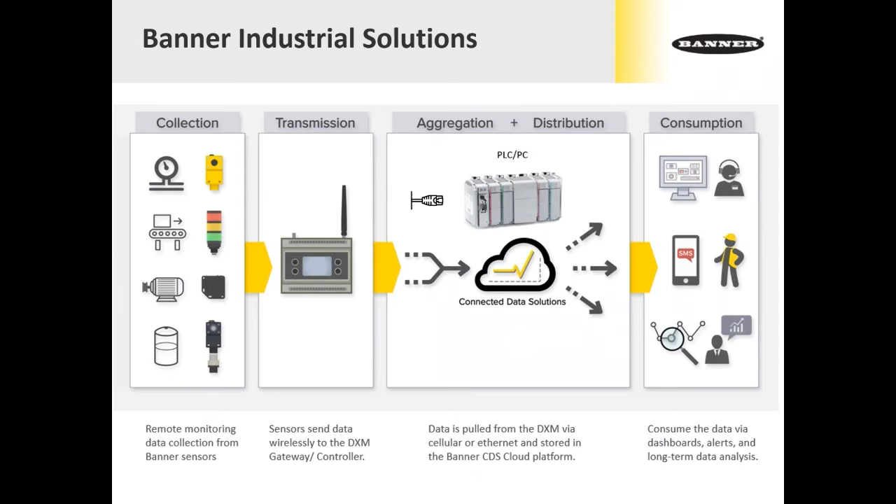Then you have the consumption side of it. The consumption is where you might have somebody in a central control room or monitoring room viewing all this data coming up from the plant floor. Or it could be a text message hitting someone on the plant floor or at home, or an email. That's considered the consumption, along with long-term data analysis, or what people are considering the artificial intelligence of going through data.

Some of our competitors have done a really good job creating these real fancy dashboards, which would sit on this end of it. But the part that Banner excels in is from the very beginning, from the data collection side, from the transmission with our new DXM controllers, along with our connected data solutions, on through the consumption side. So we can offer you the entire piece of this, where some of our competitors can only offer you bits and pieces. That's one other good reason to work with Banner when it comes to these monitoring solutions.

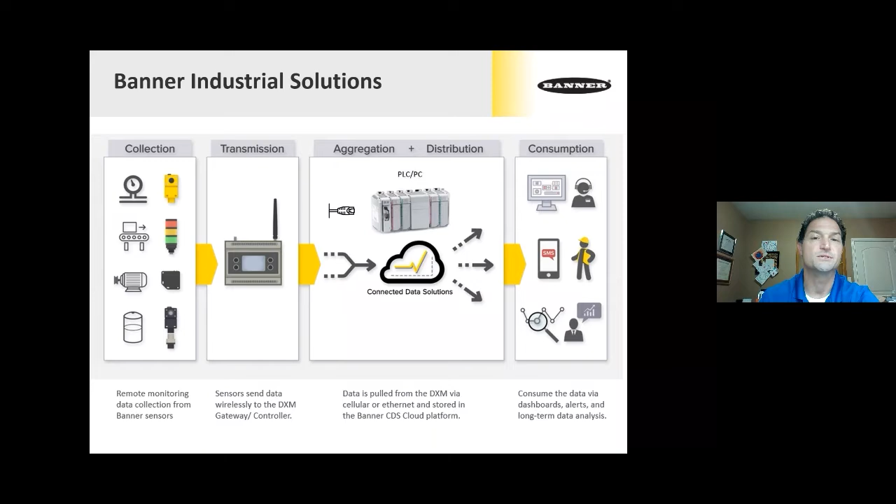So what do some of these pieces look like that I'm talking about? What do they actually do? Some of the peripheral devices we have, like our Pick-to-Light, this is a radio built into a small HMI. It's called our Direct Select, and Steve will go into more detail. This is a wireless device that would communicate back to one of our controllers.

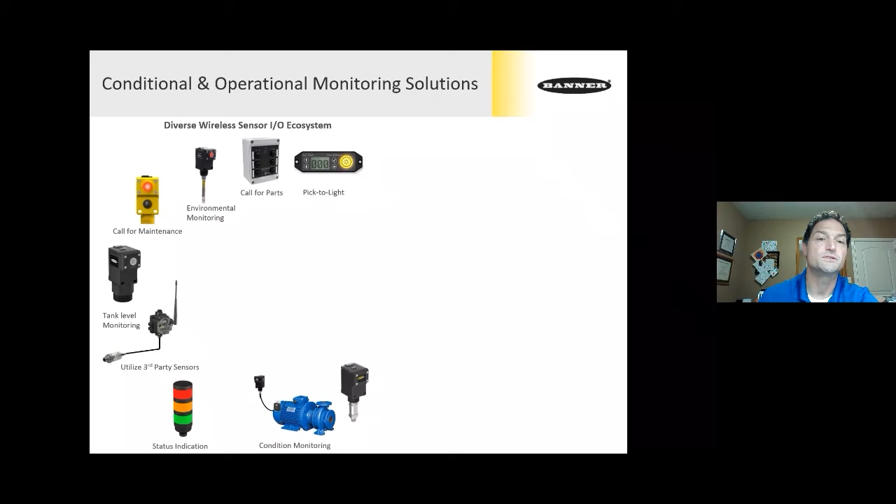Or maybe you have a call for parts application. This would be a product that might sit at an operator station, and possibly on a fork truck driver, letting them know that you need to bring parts to this location on the plant floor, that they're running low, or you need to refill a bin.

Or it could be as simple as a temperature and humidity probe with this built-in radio, that you're trying to determine if the level within your plant, the humidity and temperature during those real hot summer months, is causing you guys problems, and you need to be getting more water to your employees. It could be as simple as mounting a couple of these out on the plant floor.

Or it could be a call for maintenance or a call for supervision. So you have this one push button box, and we also have them in two push button boxes, that alarms a supervisor, alarms maintenance, or someone just to come and address a problem that's on the plant floor.

And then the all-in-one here, the tank level monitoring that we have. You have an ultrasonic built into a radio, so it could be tank level, it could be hopper level, anything that you need to take a measurement from. This would be a nice product to use for that. Also, this is a unit that we used in our solution kits that Brad Hart's going to go into more detail.

And then we have the nodes, or the radios, out on the plant floor that can collect discrete or analog data. This node here can collect 4 discrete in, 4 discrete out, 2 analog in, and 2 analog out. It can use third-party sensors. Obviously we prefer this to be connected to a Banner sensor, but it can connect to third-party sensors.

And then we've added into our tower lights the capability to have radios, whether it's in the base or in one of the segments of the radio. So if you have an existing tower light on the field and you want to wirelessly communicate to it and turn on the lights remotely, you can do that with one of our wireless segments that you apply to the tower light.

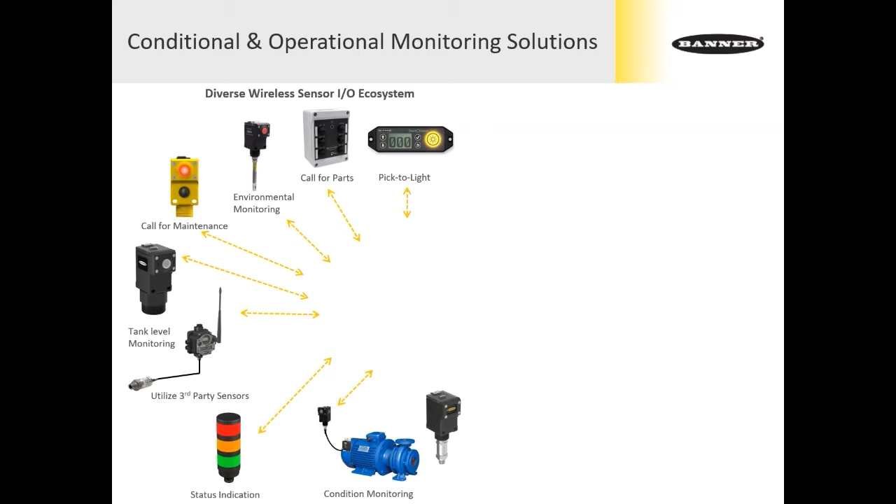So all these devices can communicate back into what we call our DXM controller, or some people might think of as our IIoT device or our edge device. As you can see, there's two antennas on it. One is meant to communicate proprietarily back to our field devices, our wireless devices, and the other is meant to communicate up to a cloud service.

It could be your own in-house cloud service, or it could be the cloud service that Banner is able to provide, and that's something that Steve will go into.

Or maybe your preference is to communicate to a PLC or PC-based control system on the plant floor. So with the RJ45 connection on our DXM controller, you can wire in directly into a PLC or some kind of managed switch via Ethernet IP, or soon to come our Profinet, or you can communicate Modbus TCP.

Also, directly from our DXM controller, we can do text alerts or emails. It's a simple setup that we have a write-up for on our DXM 700 controller.

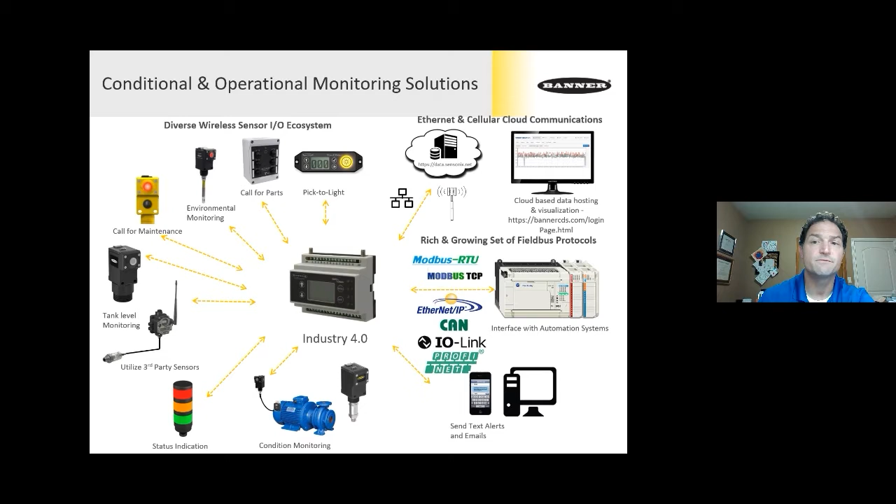So what does it look like for the types of networks that we can offer with these different devices? What we have is a performance network and a multi-hop network. The performance is a point-to-point communication. So from the DXM controller, you would communicate directly to one of these radios or nodes in the field.

And with the multi-hop, it's a mesh network, what we call self-healing. So if one of the radios needs to be used as a repeater to communicate to one of them further out, it will take that path of least resistance.

So with the performance, you can communicate up to 47 nodes out in the field. And along with that, we have two different frequencies offered: the 900 megahertz and the 2.4 gigahertz.

The 900 megahertz is the reason in the US it will be used, is the 900 megahertz gives you the longest range. So the distance that can be communicated is 6 miles line of sight. And we know that none of these facilities are line of sight unless it's agriculture. So we come in typically and we'll do what's called a site survey to make sure that we can communicate clearly between the DXM and each one of the nodes.

The 2.4 gigahertz is something that's going to get us about a 3,000 feet communication from the DXM to the individual radios out in the field.

They're labeled from motors 1 to 10, 11 through 20, 21 through 30, and 31 through 40. So you can do up to 40 motors with this system. Now, you may not have all 40 motors, so you can easily click on the X in the upper right-hand corner to hide those particular groups.

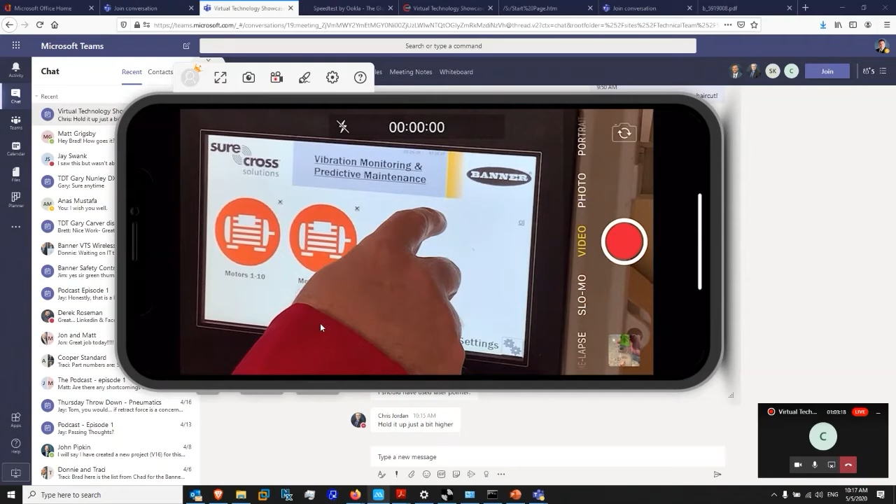Okay, maybe you only have a handful. Again, if you want to show those again, you just click on that same square to bring them back.

If we click on a group of 10, then we see an array of the 10 on the screen itself. And you will notice that one does show a unique green color, because that's the one I just affixed to the side of the motor, and that is the unit that is communicating at this time. None of these other motors have a vibration node communicating to our DXM.

Okay, these are unique names, motors 1 through 10. You can choose to click on the motor name itself and give it a unique name. Maybe I will call this... I'll just call it Brad, okay?

So now that text name is going to show up everywhere that's related to the motor called Brad, okay? But the first thing you would want to do when you get this solutions kit is go to the main screen. Let's go back to the settings. So this is the main screen.

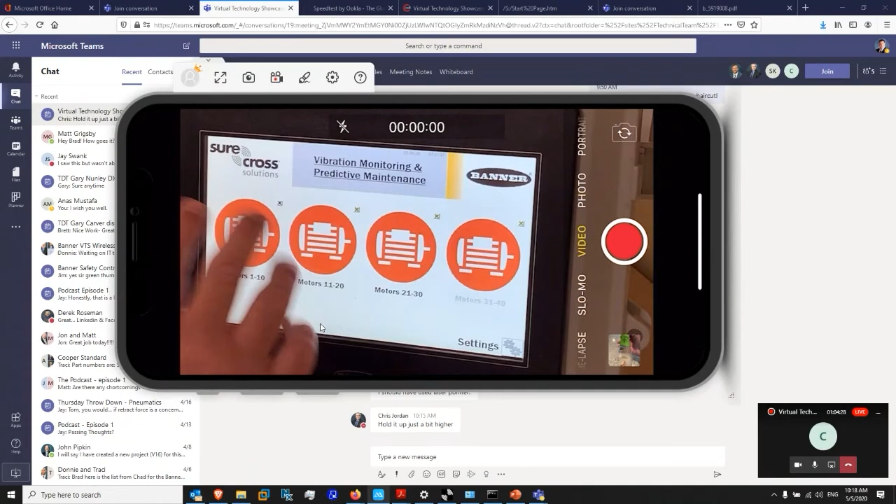In the lower right-hand corner is settings. Click on the gear icon. Now here's where we can set up the binding. Click on binding.

In groups of 20, 1 through 20, 21 through 40. Here's that name Brad that carried over.

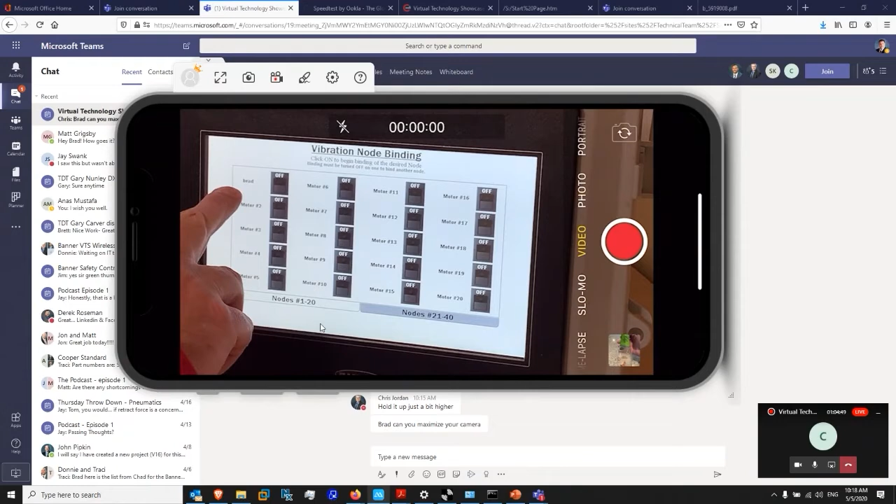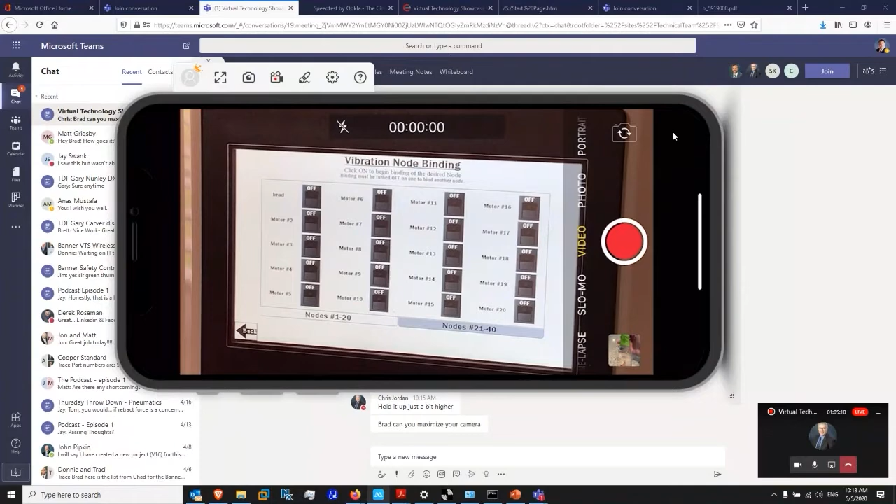Excuse me, Brad. Can I ask you to zoom in and maximize your screen? Absolutely. Well, I'm seeing your teams. That's why I'm asking, you're seeing my teams. Your teams window, you're sharing your whole desktop. Ah, I understand. Okay. Maybe that's a better view.

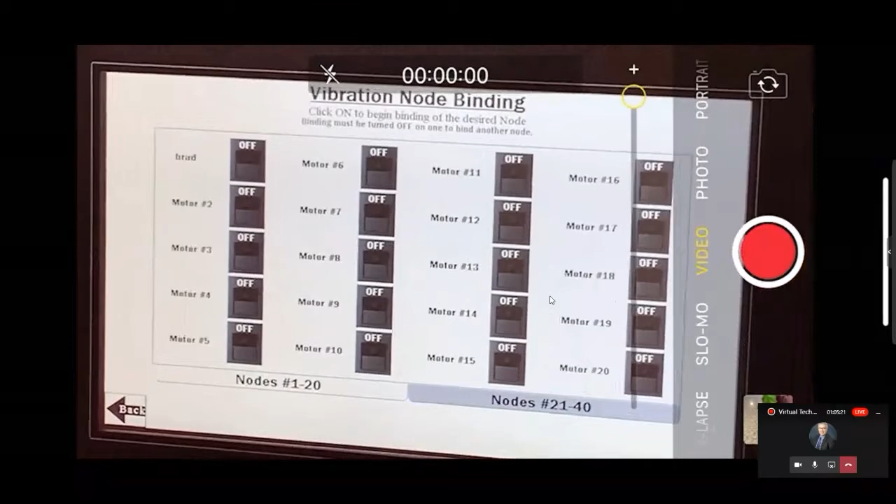Okay, so we would need to bind the node. Now what I'll do is take this, our second node, node number 2. Currently it is not powered on because there are no lights flashing on it.

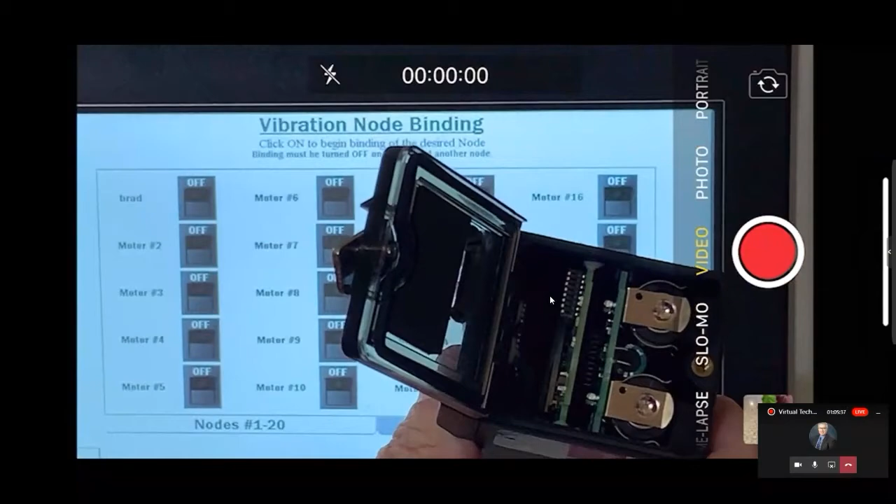So there is a button in the top of the node here that I can press and hold down, and then it will turn power on. You see the lights start to flash.

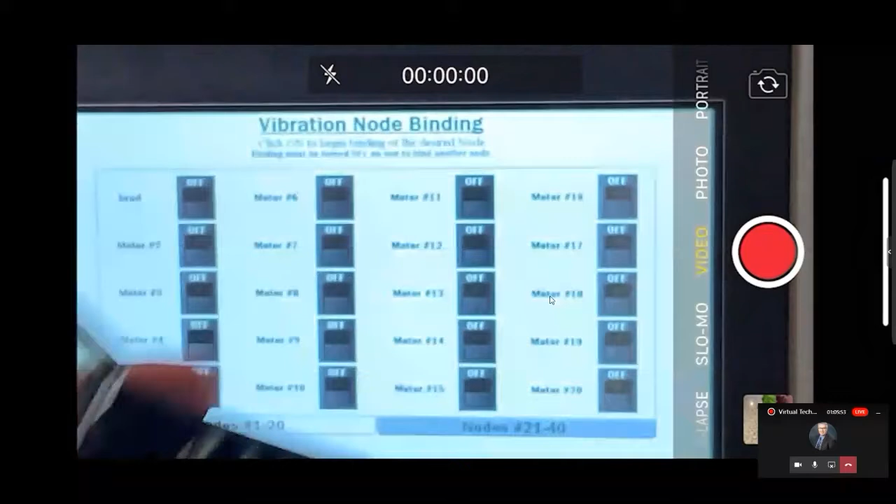Next thing I want to do on the screen is for motor number 2, I want to turn that switch on to put the DXM into a binding mode.

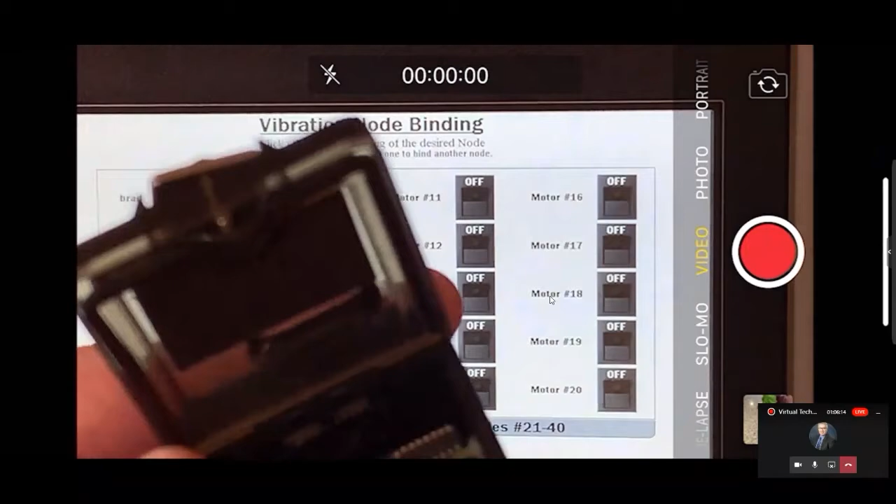Okay, so now the DXM is announcing out to the wireless world of Banner, hey, I want to bind node number 2. So going back to this node, to bind it, all you do is triple click button number 3, or triple click this button three times. 1, 2, 3.

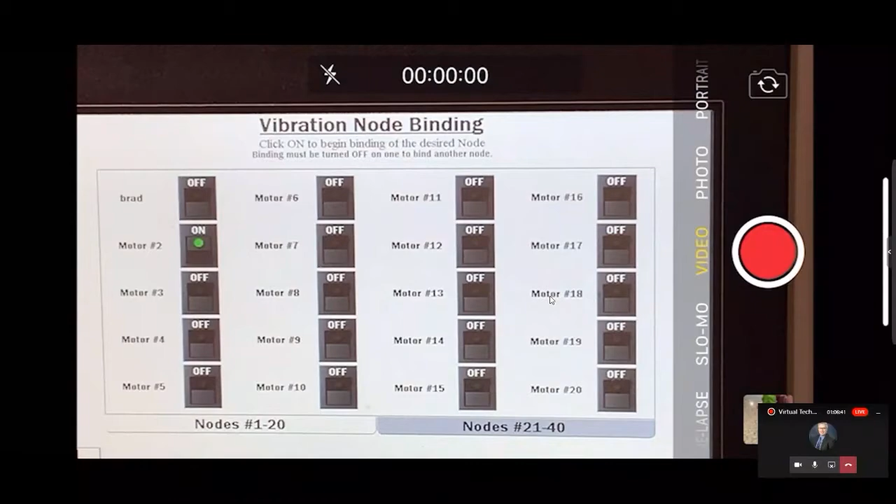You see the lights change state to go into a binding mode. And once it is bound, you will see the status change to confirm that it is binding or that it is bound to the DXM gateway. So that's how you go through the process of binding a node.

In addition to this style of housing, the Q45, you do have the traditional DX80 type, where they have the 2 rotary switches. The left switch does the tens digit, the right switch does the singles digit. And the same thing would be true.

Okay, put that in the binding mode, you turn power on. This determines the binding number for this node, and then it will become bound by triple clicking button number 2, and then triple clicking to turn it back off. Okay, so we're done with the binding, and that is bound.

So let's just ignore that nuisance message right now. All right, so now if we go to motors 1 through 10, we should see the status come up for motors 1 and 2. There's motor number 1.

All right, now if we go into motor number 1, okay, and again, I apologize for this message. This sometimes happens when you're doing a demo and you want to be able to monitor things in a fast mode, which I don't have at this time, so bear with me.

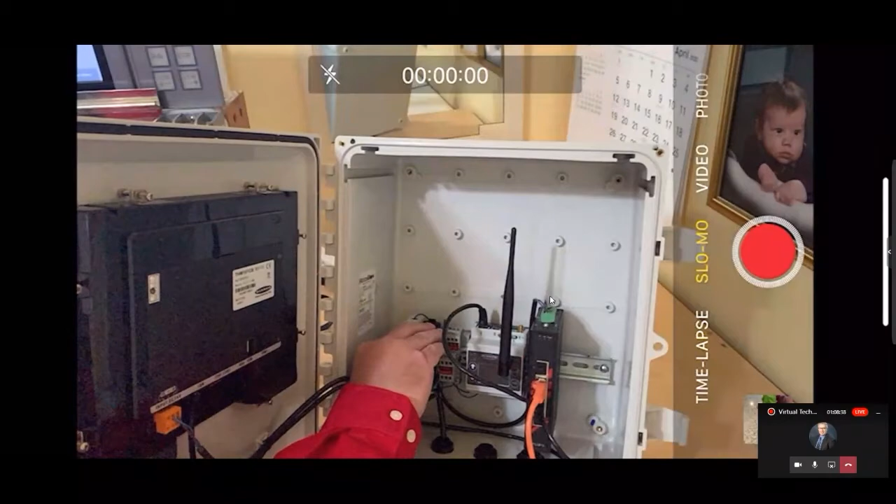All right, bear with me. Sometimes even when you do demos when you're live in front of a studio audience, or even through an event like this, things tend to happen, and that's okay.

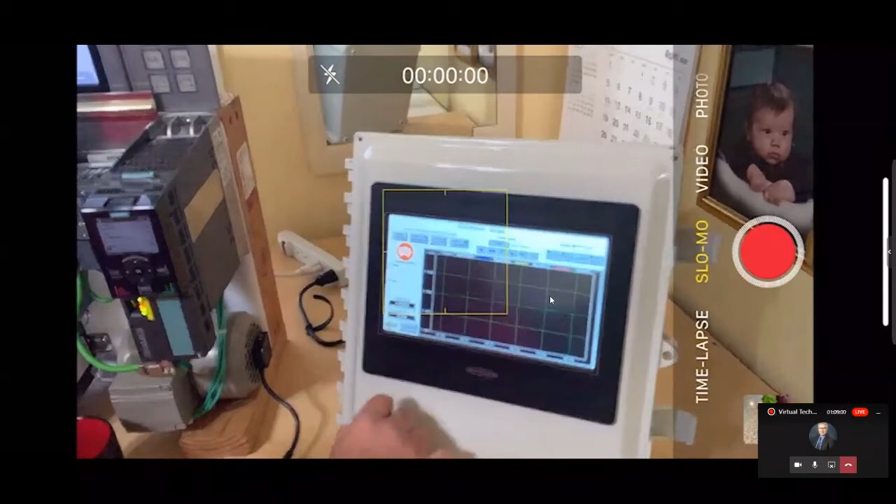We'll just reboot this. We got our node already connected now, and what I want to show you, once this boots up, we'll go in. Now this is the trend screen here.

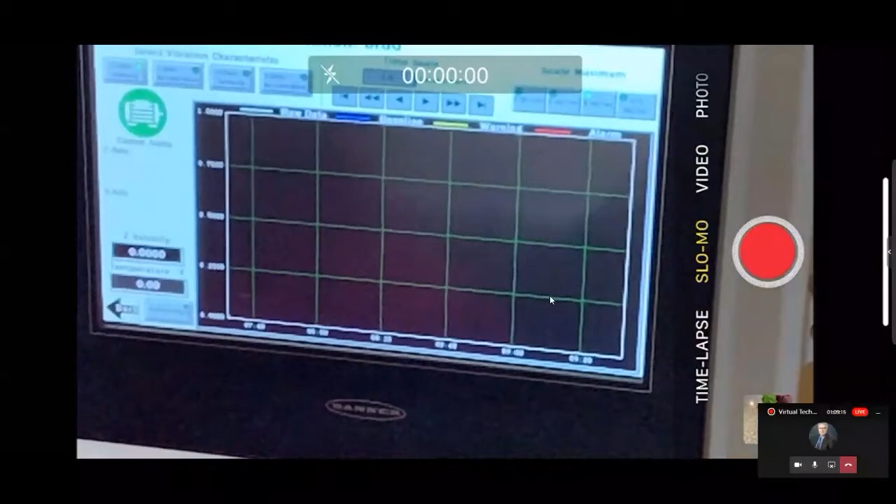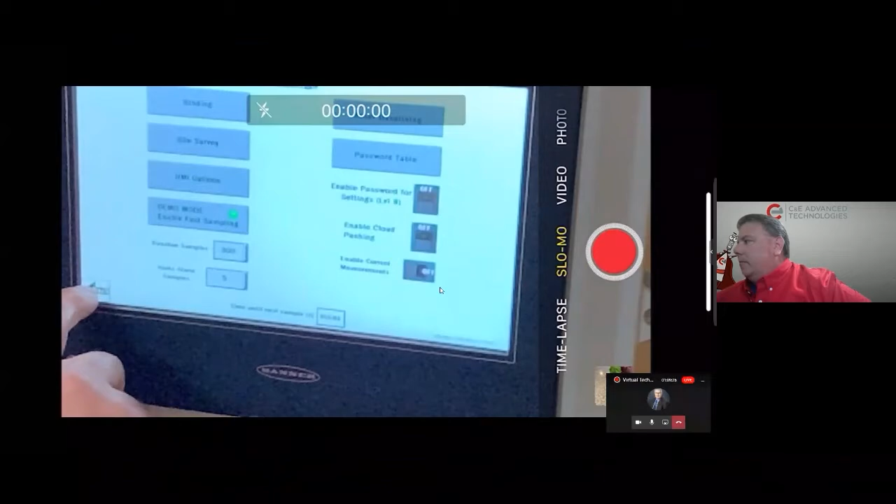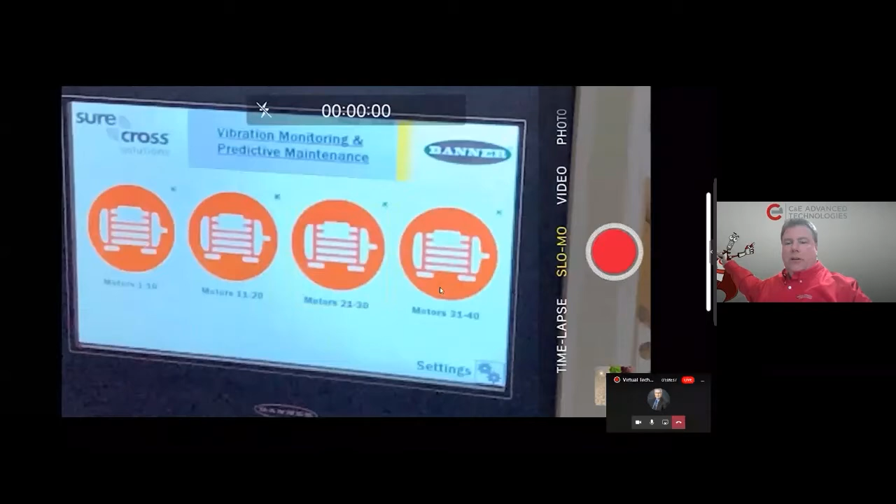Okay, and I'm going to start up my drive. Before I get that, I do need to put this into demo mode for fast sampling. Otherwise, the sampling that's occurring between the DXM gateway and the Q45 node here is happening every 5 minutes. So if we go into fast sampling, then it's occurring as fast as possible.

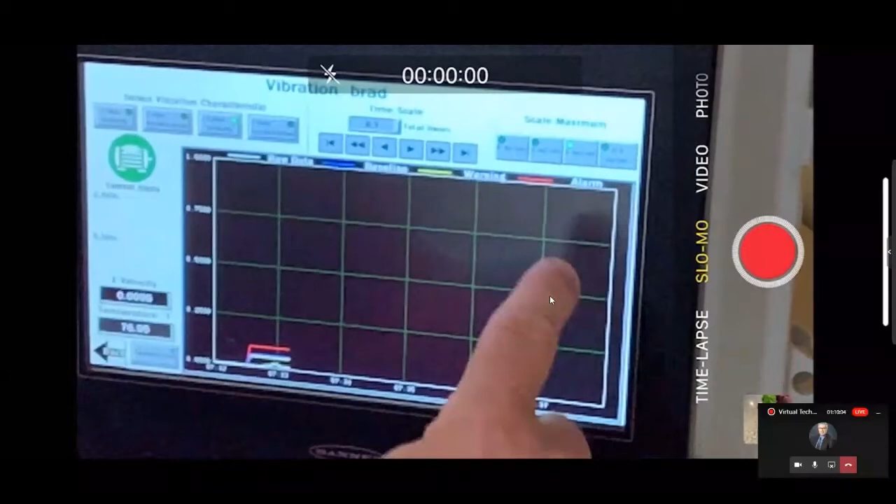Now I want to zoom in on the time scale. It's set to 2 hours. I'm going to change this to 0.1 hours. Scale maximum set to 1 inch per second on this velocity axis. I'm going to go to 0.5 inches per second. So now we can start to see the scale pop up here.

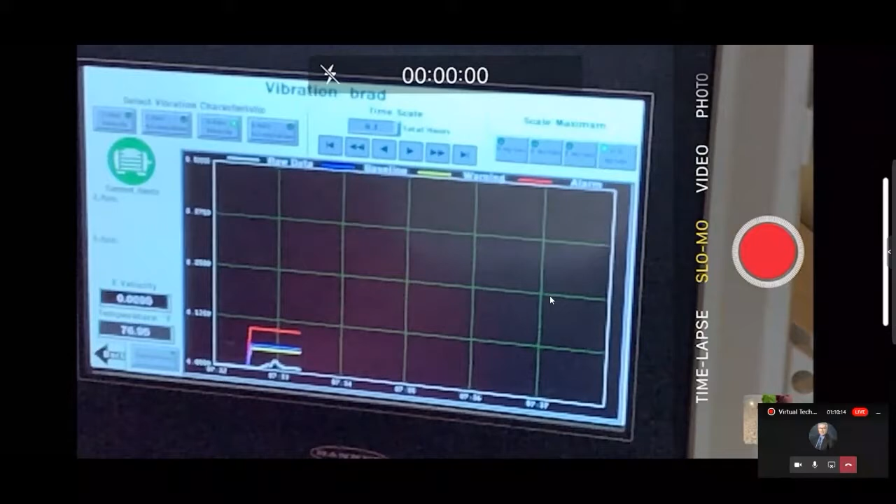I know it may be kind of hard to see from the camera here, but this is the x-axis velocity that I'm measuring at this time. And the value is 0.01 inches per second. And I'm running about 20% speed on the motor.

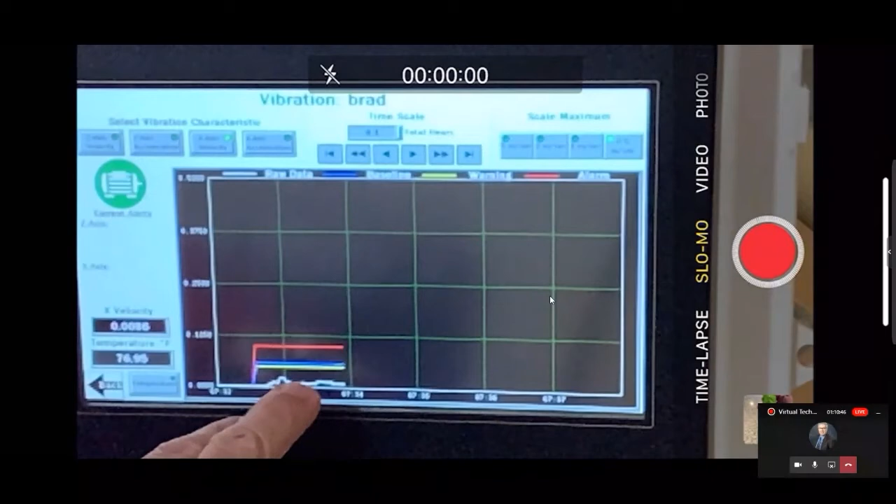Now, the other lines you see here, the white line is the actual value. The blue line is a previous baseline that was set previously, and I'll go into that in just a moment. The yellow line is for an alarm and or warning, and the red line would be for a critical alarm. I'll cover how those are set in just a minute.

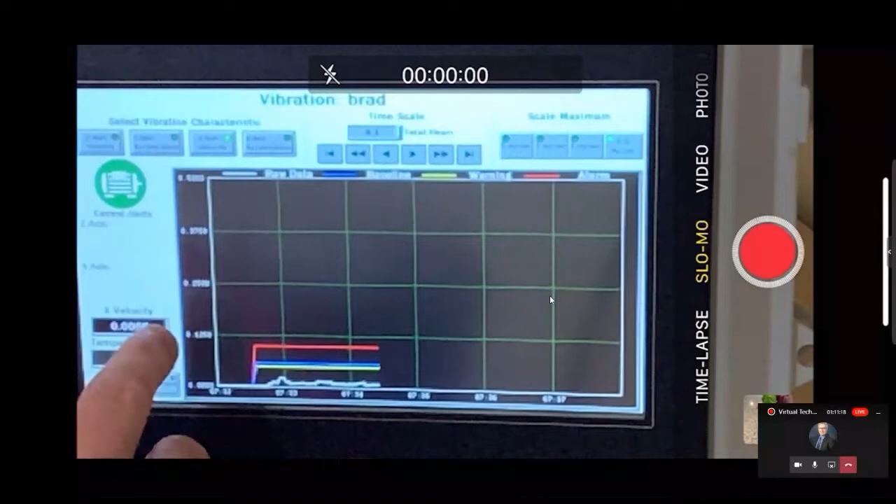But here we are, we see the velocity setting at 0.01 inches per second. Now, if I were to speed this motor up to about 30% speed, right now everything seems to be just fine and dandy. If I go up to about 40 or so percent speed, there's 48%. So far, so good.

But as I increase that and go a little faster, you may see a bump, but I believe if I have this set right, and I have a washer taped to the shaft to give me, to impart some vibration, otherwise there's no load on it. Now we see the spike in the velocity going above and then coming back down again on the warning track. Now our velocity is up to about 0.04 inches per second.

If I speed it up and go faster with that counterbalance on the shaft, I'm all the way up to 92%. If I go up to 100%, I can really start to feel the vibration. We'll see what the velocity does.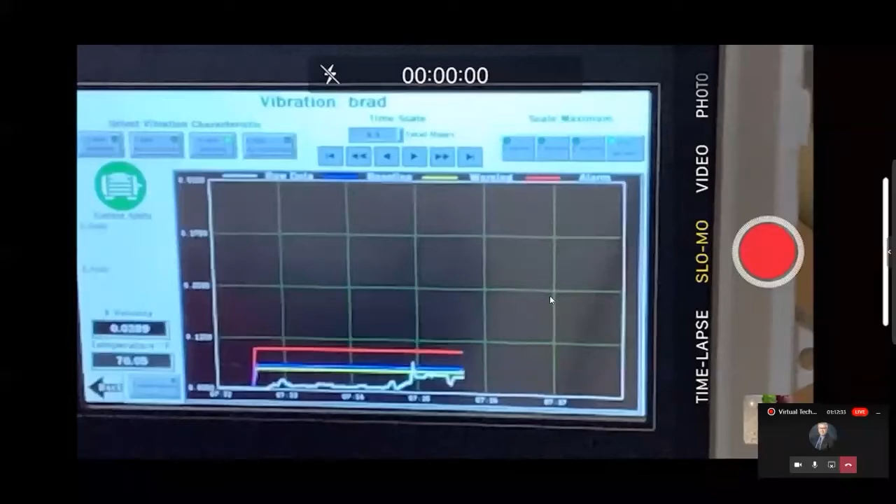All right, so we can see that occurring here. We can also go look at the acceleration. We see it trending as well. That's on the x-axis. We go now to the z-axis. We see that it's actually above what these threshold limits are, and we have an alert state and we've gone red. Okay, and then here's the acceleration as well.

I'm going to go ahead and turn off the drive. So the velocity is good for determining if you've got any issue with worn belts, a loose mount, things like that. Acceleration is good to determine if you have like a flat starting to occur on a bearing, which tends to come around maybe once a revolution, so to speak. So that's where velocity and acceleration comes into play.

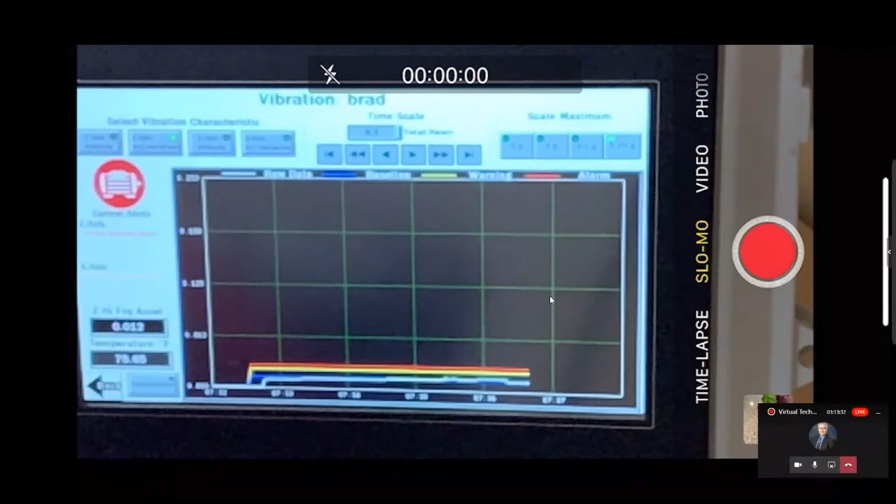You also have the ability to look at the trend of the temperature as well. Now, how these baselines are actually calculated, go to the main screen, go to settings, into asset baselining, and here's where you can actually start the baseline for one of the units.

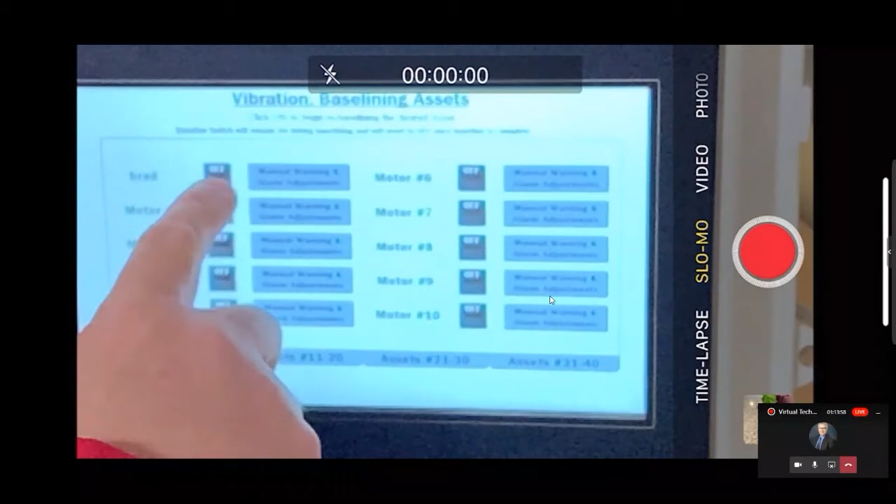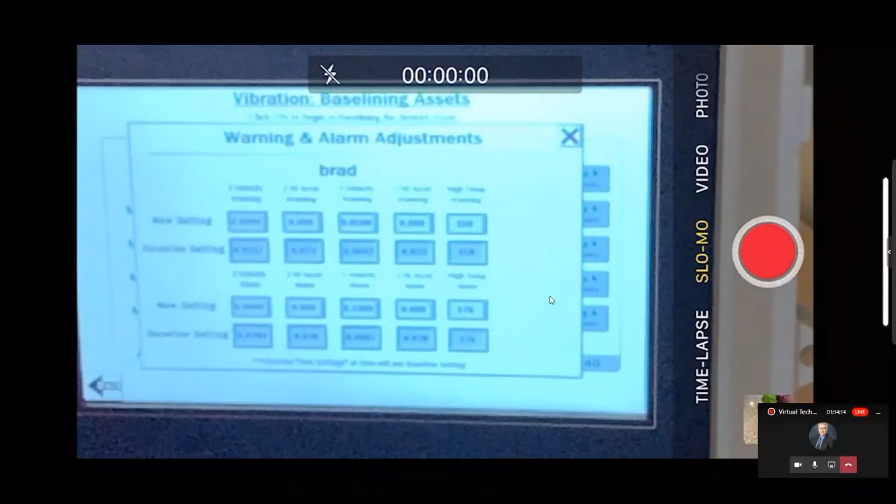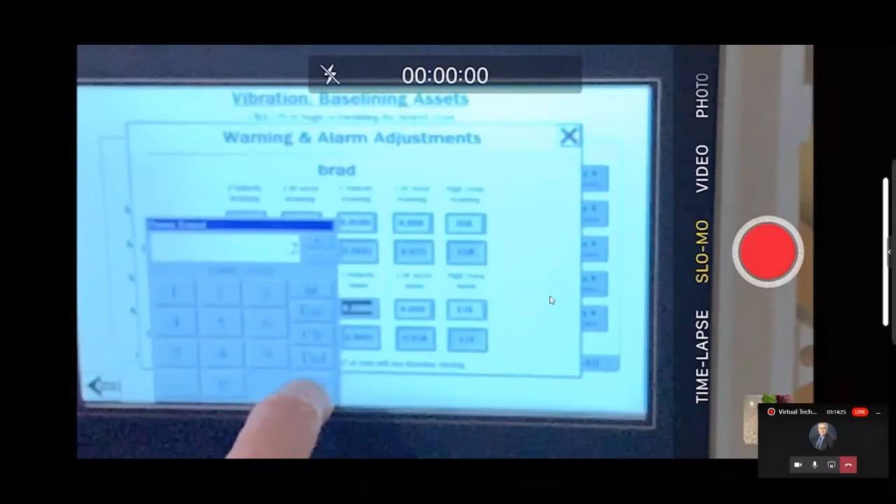Now, for some reason, I was already in a baselining for motor number 2, but you can actually manually adjust the baselines by clicking on the button for the respective motor and then manually changing those values. So if I wanted to bump one up, I can manually bump up the alarm setting for the X velocity from 0.1 to maybe 0.2 and enter, and now that setting will be there in place.

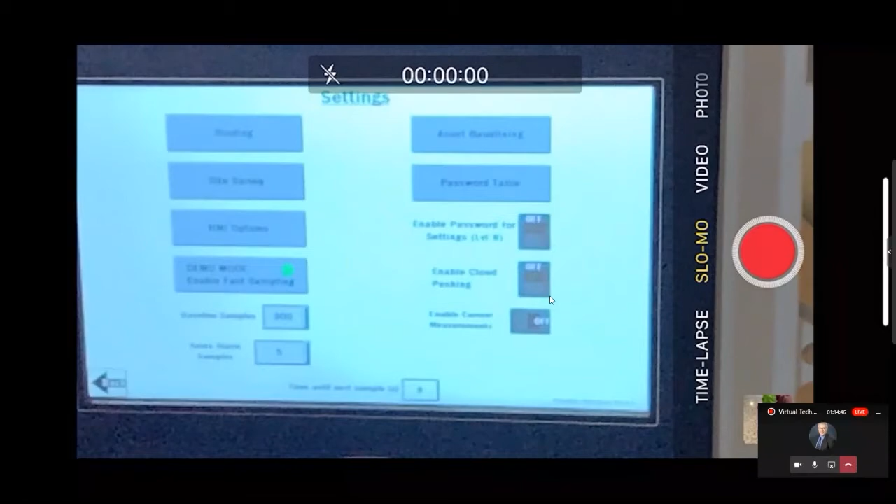But if I wanted to do a baseline, the total number of baseline samples by default is set to 300. And if we're taking a sample every 5 minutes, that's about 25 hours, I believe, to create the baseline. So you want to make sure that motor is running for a long time in order to generate that accurate baseline. The next field down below is called acute alarm samples.

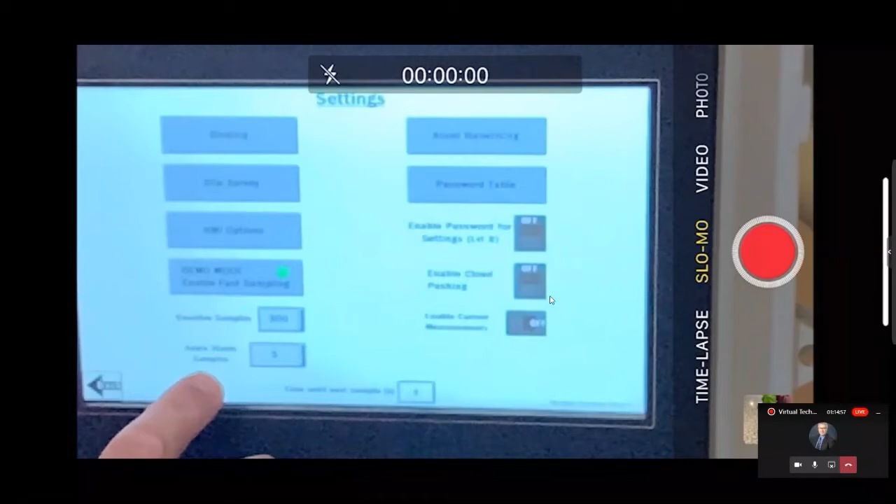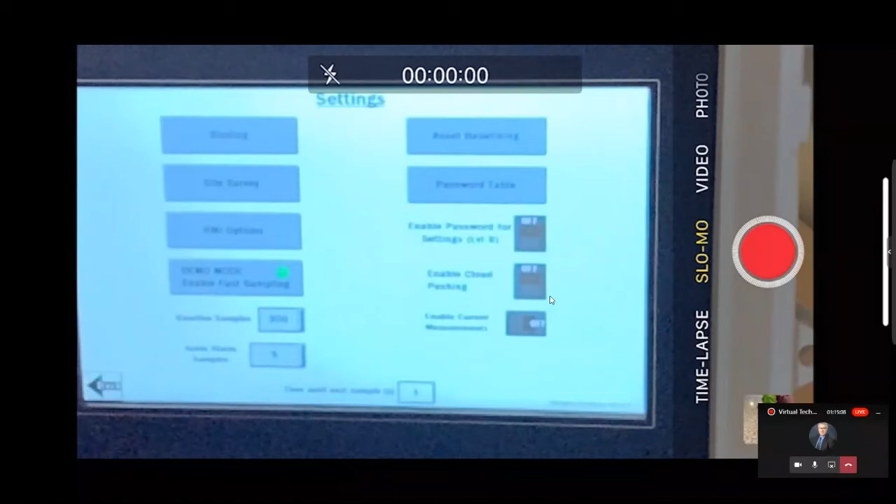All right, and that is set to 5 at this time. So that means that if there are 5 consecutive samples in which that value is above the alarm limit, then it's going to indicate you truly have an issue at your machine, your motor, your gearbox, wherever the case may be. And so that's going to go red and it's going to stay red.

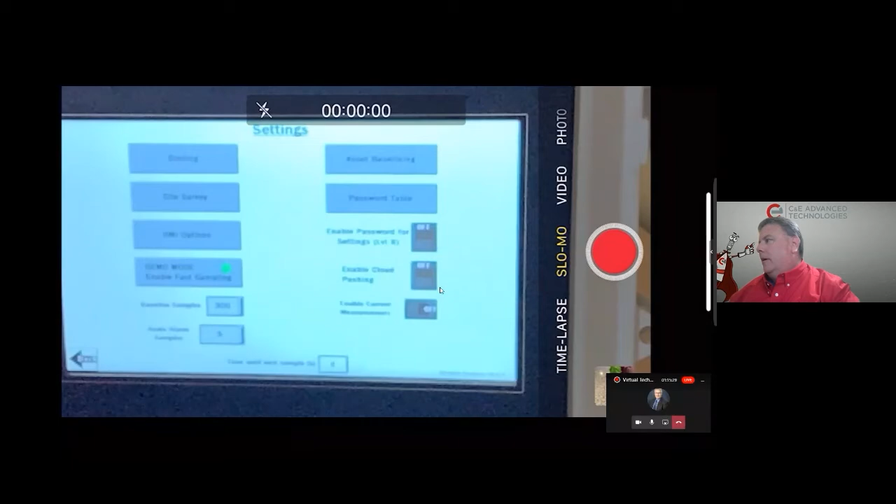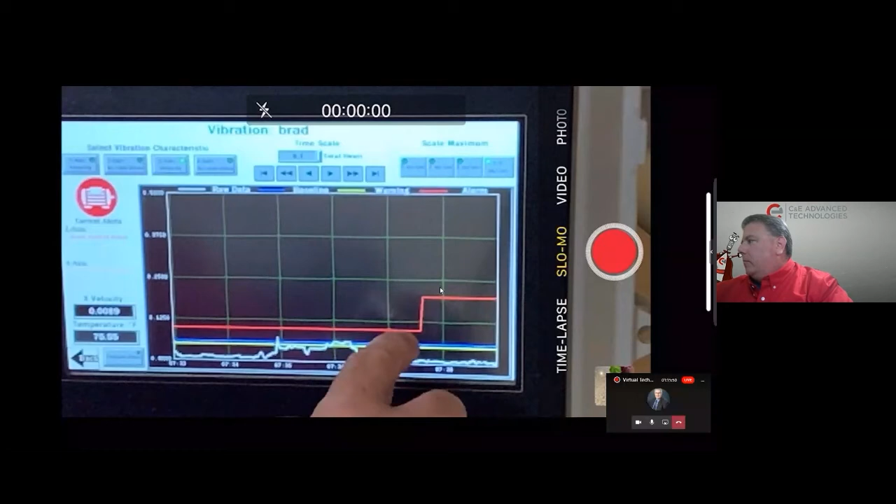Until you get the situation resolved. Once the baselining is complete, when you go back to look at your motors, you're going to have a new set of trend lines here, your baselines on your graph. And so that blue line, which is where you would have actually measured it, may have moved. If I was running at 20% speed on my motor, which in my case may be normal condition, that blue line would have moved further down to where that bottom white line is, okay? And the yellow and red lines would have adjusted accordingly.

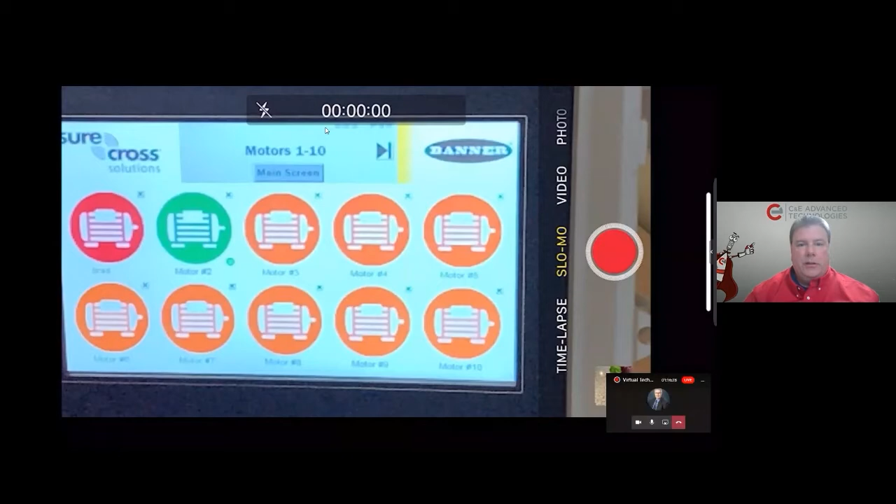Again, this is capable for up to 40 motors. And there are 2 other products that I believe Banner has as well for a solutions kit. You have the vibration temperature monitoring. Let me shrink this down here.

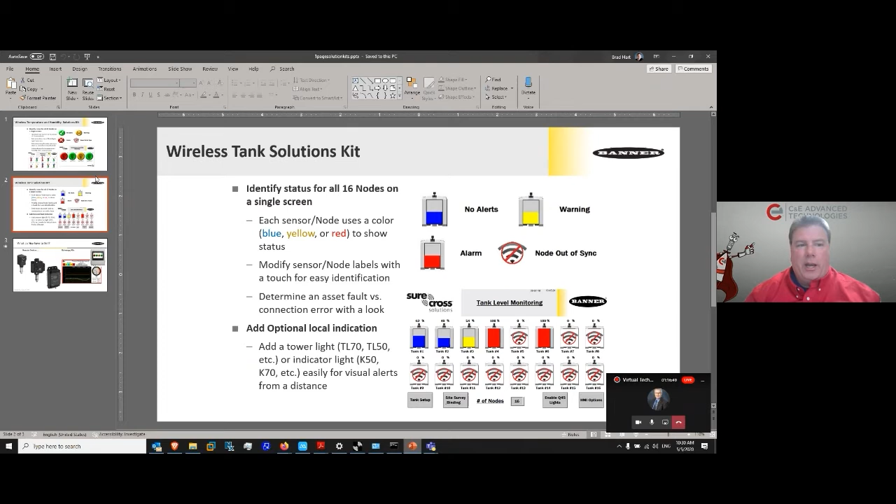The other two possible kits: there is a wireless temperature and humidity solutions kit that's available, and there is a wireless tank solutions kit. Now this one offers you to connect up to 16 nodes at this time, where the vibration and the temp and humidity allow you to go up to 40 nodes total. And looking at this last slide here, it looks like possibly there's one on the way that could be for pressure as well.

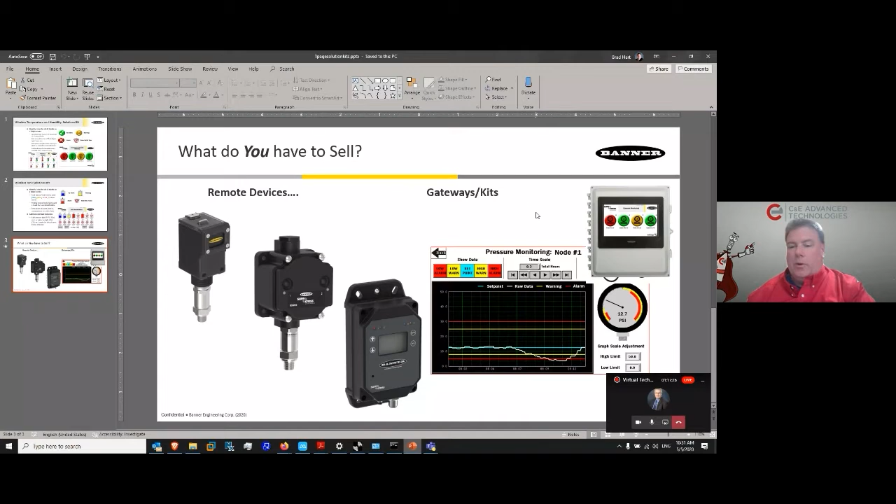I apologize for the hiccup there with the little nuisance alarm message on the screen, but for the most part, that is the solutions kit. Again, you just drop it into place, bind your nodes to your gateway, do your baselining for each of your sensors one at a time, rename your motors if necessary, and away you go.

Back to you, Hey Brad. Yes, so we have a question. Okay, can I send or receive a text message if an alarm happens?

Can you receive a text message if an alarm happens? There is the capability to send email messages, and you are able to send a text message via an email by using Verizon or AT&T, whatever carrier that is, to send a text message from an email. So that is possible. The DXM also has the ability to add a cellular modem to it, so in a sense you could send out text messages via the cell modem. So that capability is there, and it is possible.

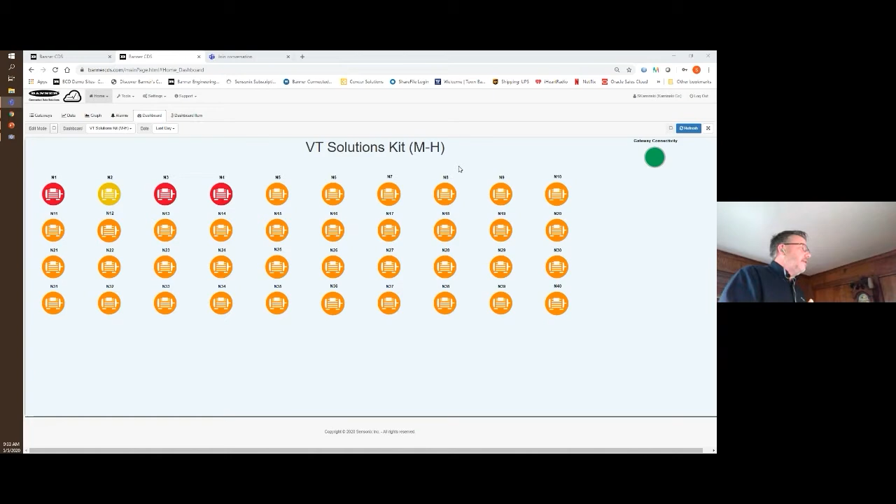So Banner CDS, and what this entails here that you see, is very similar to what Brad was showing you earlier with the hardware kit that would be located at your factory. This is going to be your virtual connection, so if you like, you can do it in this fashion as well. With this is a pre-established dashboard, you don't have to develop this. It comes pre-developed for you when you utilize Banner CDS for your vibration solutions kit. If you notice, we've got, like Brad had, 4 large icons on his first main screen.

You represented the icon number 1 was motors 1 through 10. I've got 40 different motors shown up here just to give you a quick view. But what you can do is, just like Brad was doing, he was drilling down into a specific motor and looking at velocity, acceleration, temperature, elements like that.

So what we have going on here is a real basic connection piece, if you would, to the same thing Brad was showing you. When I look at this, I'm going to grab one of my motors, and I've got motors that are either in a warning or an alarm state this morning. So I'm going to grab motor number 3.

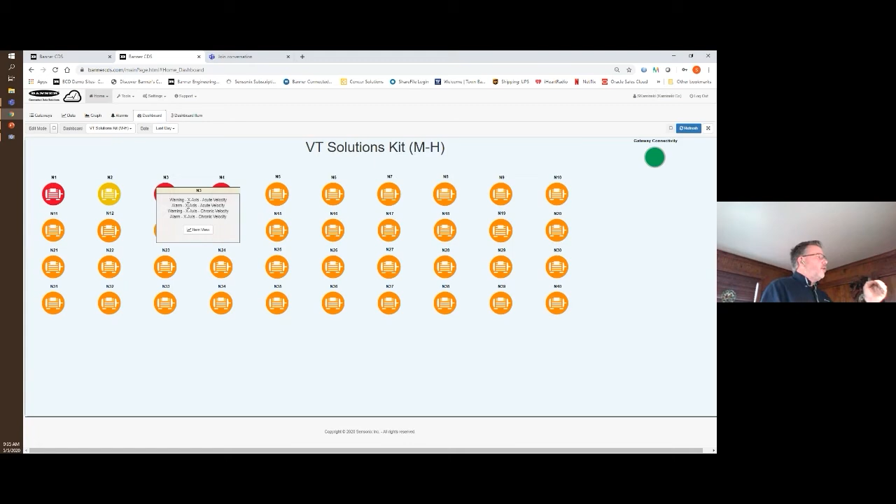I'm just going to click on this icon, and it tells me this is the problem that's going on. So I got a quick view of it, and it says I've got a lot of x-axis issues, short term, like Brad had mentioned, with the acute, and also some long-term velocity issues too.

So what I'm going to do is click on this item view, and now you're going to see a view similar to what you were seeing when Brad was showing you the individual screens on the kit. I'm going to just show it to you all as one up here, where here is that velocity. So Brad would show you the velocity of a given motor.

So here's my velocity of this motor. It was sitting idle over the night. This is a 12-hour view on the screen right now. So it was sitting idle overnight, and then I turned it on this morning. And you can see the vibration and the velocity in the z-axis that's going on.

If you want to look at the x-axis, you have that as well as the acceleration elements. So if you wanted to go in and look at your acceleration items, you have those available to you as well. So you've got a number of different elements within here. You also can see that we're showing the temperature. So again, just like what Brad had with the kit, you're seeing that as well.

And then we're also showing those baseline settings. So when you do a baseline for the motor, you can do it at the kit. You can also do it if you're looking online. You can re-baseline that given motor.

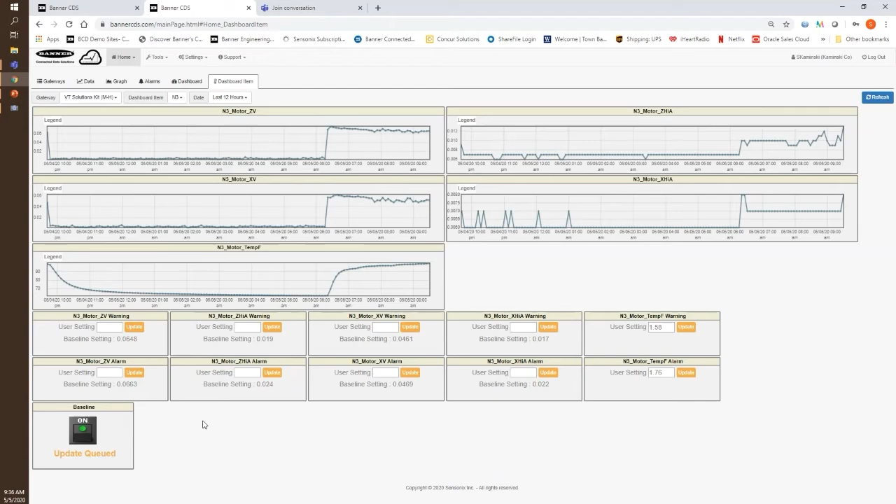As an example, I can come in and just toggle this on. And what it's going to do is update my screen. The next time that the kit talks to our website, we're going to see that update happening, and it's going to go ahead and start the baselining automatically from our remote position. So a very easy way of doing this with the Banner CDS, kind of an extension to what you have going on with the solution kits.

So we're going to jump out of this. I'm going to change over my screen here, and we're going to do a little PowerPoint real quick on OEE.

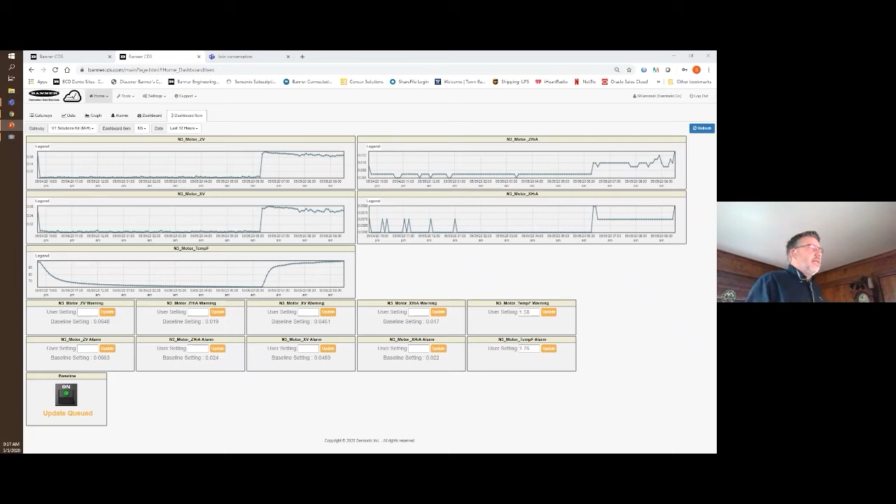So on the OEE side, now we're going to jump over from monitoring vibration and current, doing it in the kit and then online, to another thing that we actually do at Banner Engineering. We do a very nice solution also for OEE, or overall equipment effectiveness. So we're going to be looking at OEE as we go through this and determine how the machines are running. What's their best state? Are they performing well? What else needs to be done with them?

So we're going to look at overall equipment effectiveness, or OEE. We're going to use it to monitor machinery uptime and downtime. We're also going to be looking at cycle time on this. We're going to deal with how long it takes to change over a machine, maybe some setup time, teardown time, your quality elements. That's what OEE is about. So let's talk a little bit about that and what we've got on the Banner side and how we can make this all work here for you.

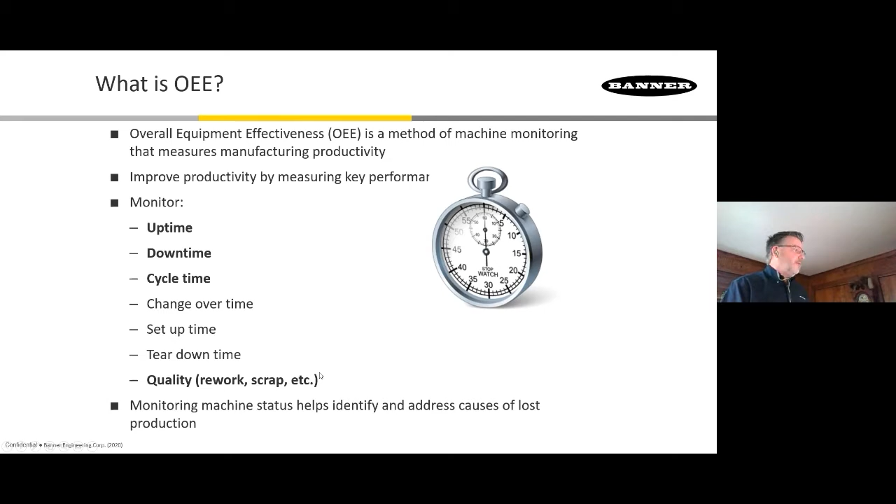Let me just change over my slide here. Okay, so OEE is essentially the available time that you have on a machine compared to your actual running time. It's also part of that equation is your theoretical production. How much can you really make versus what you're really doing?

What is your true production for the day? And when you get into that real production, that true production, how much of it was good product? So this is basically the formula for OEE.

In other words, it's basically saying how much time do you have available? Are you using it? How much productivity or production do you have available, and are you using it? And are you actually making good parts? So what's the quality function there as well? So that's OEE in a nutshell.

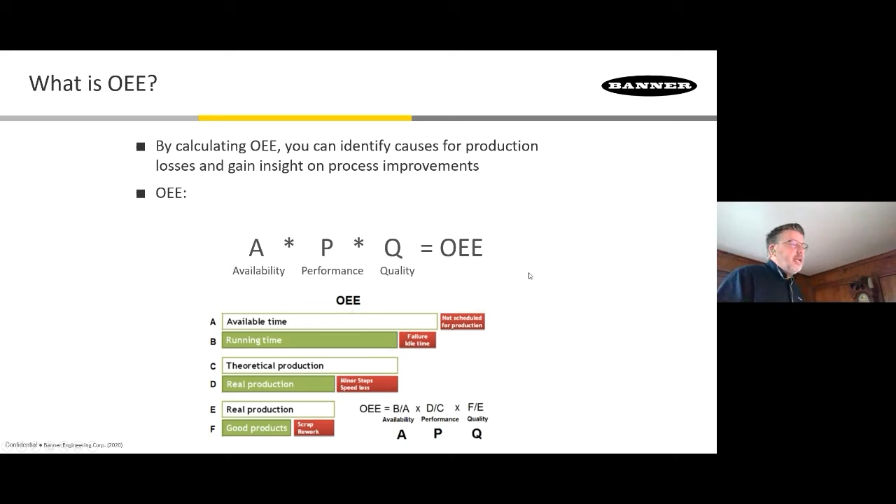Now, with OEE, you can do a number of different things, like we mentioned, looking at quality of things, looking at uptime, downtime. And some of the products that we have at Banner that allow you to do this are, as Chad mentioned earlier in his presentation, items such as our push button boxes.

Now we've got multiple options here for push buttons, and these can be powered with 24 volts or they can be battery powered, so they're easily deployed. These are mechanical push buttons, if you want to think of them that way. They also each give you feedback to the operator, so they know what's going on and what's the status of their operation.

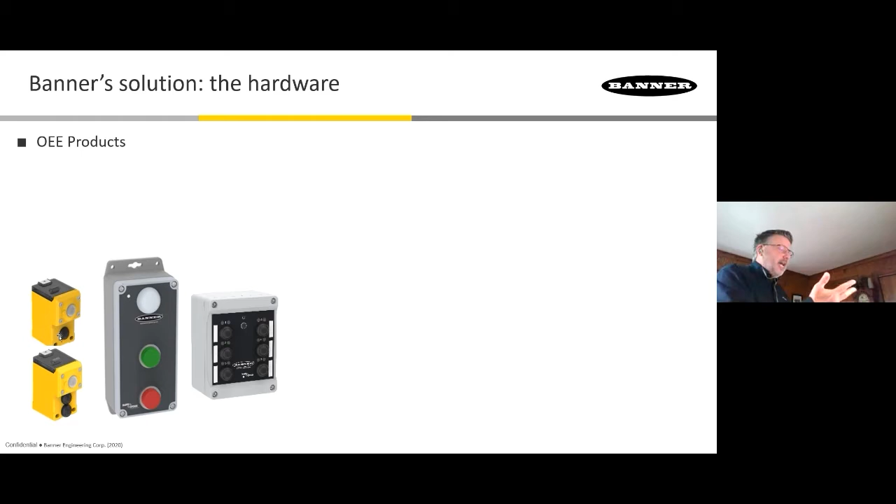So when you look at this, it makes it a very simple, easy way to deploy solutions. Make sure that as far as OEE, monitoring your machine health, and if they are in a stop time, in a downtime, you've got options in order to call those out. So what do we have beyond the push buttons?

We've also got Direct Select. Direct Select is a hybrid device. It has got an operator interface, and it'll give you basically a 3-digit number. So if you need to pick a certain number of parts, or you want to give a certain code for why you are down at your workstation, maybe code number 3 is for a quality issue.

You can scroll up or down, take it to 3, and you can actually send that value back into the system. Say, hey, I am down. Workstation 2 is down because of a quality issue. So that's what you have with the Direct Select, and that's how that works.

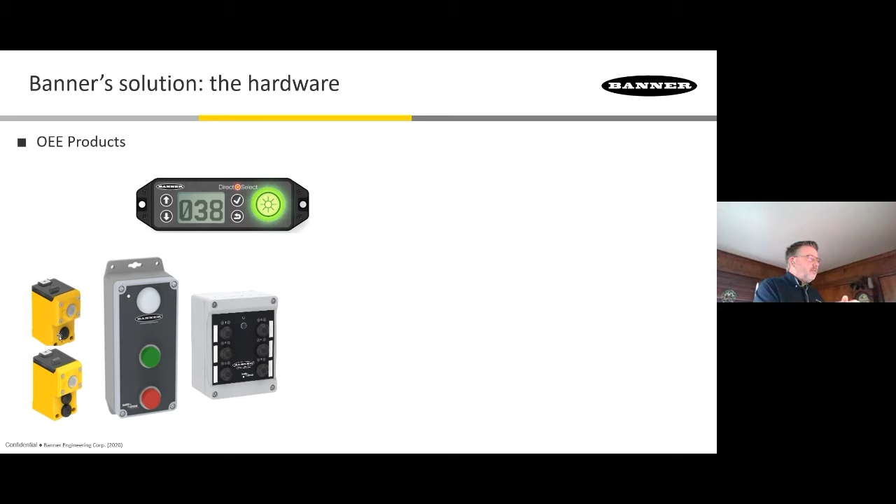Just a quick example of what it can be. It can be a very smart button. It also has got that green indicator and the green push button on there. That helps you determine whether you've got good parts or bad parts. If you're running in good time, that can be controlled remotely. So you've got some really neat solutions that you can do there with the Direct Select.

The TL70 light gives you the advantage, again, to bring in more inputs directly into the light. We monitor those inputs and we can send those back over to the main system. Say, is the machine running or is it down? So you've got different tools to bring in a variety of different inputs there.

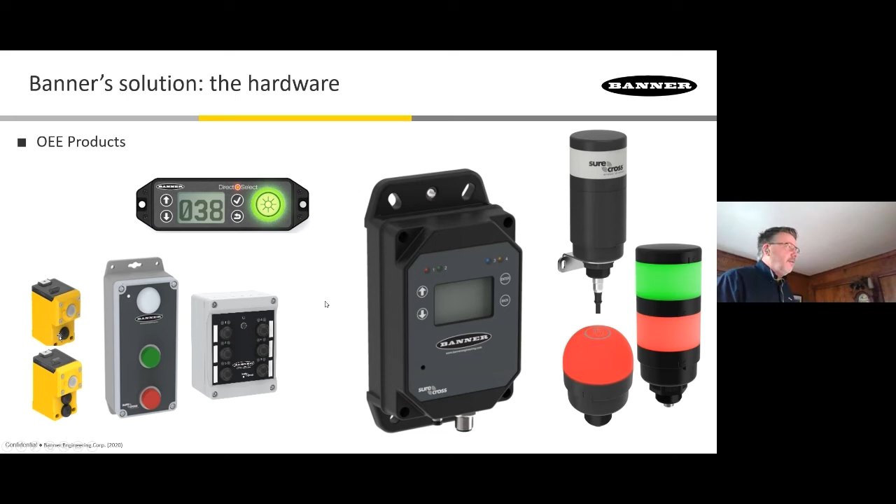As a quick wrap on that, a couple things we do with these: not only are we bringing together the current status of that stack light or push button, but we're also totalizing those parts. We're calculating things such as the on time within our devices, and we're looking at the count of each time something turns on and off, so you know the number of cycles you've gone through. We're also looking at whether you have lost communications, so we want to make sure the data is good. If there is an RF issue, we can inform you of that.

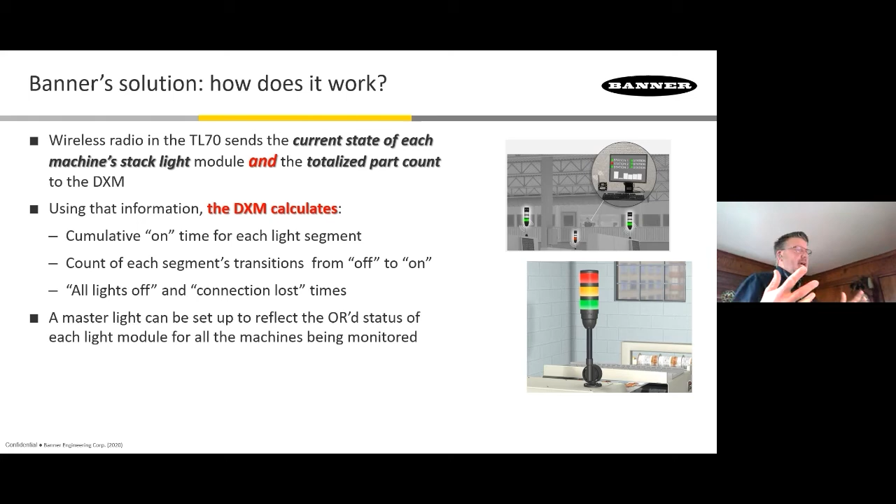But also, what's going on? Why are the lights all off? What's happening here? So you have a great method for feedback from the solution or from the system that tells you, again, how effective your equipment is running.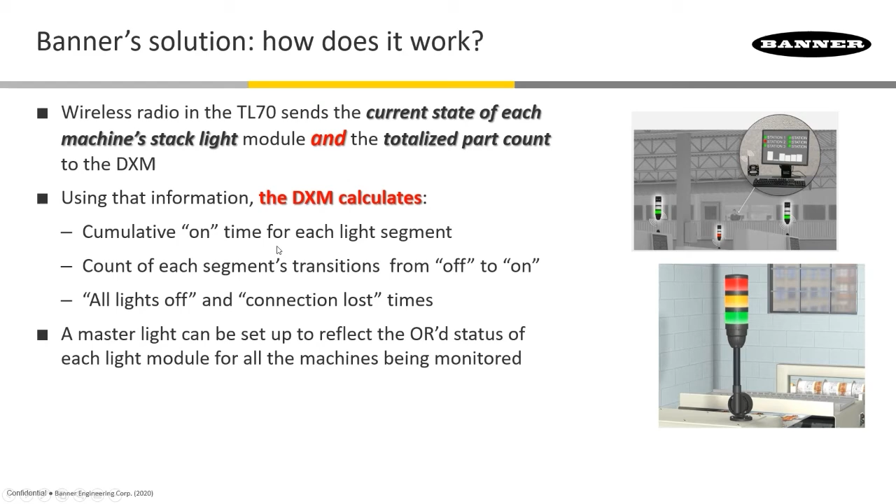Let's take a quick mention here as well. We do have the software already developed for doing an OEE solution. We also have the software developed to do the vibration kits, the tank level kits, temp and humidity. We'll also have the new one Brad mentioned, the pressure kit. Those are also available as software elements as well. In this case, we don't have a physical hardware box developed, but we do have all the software created.

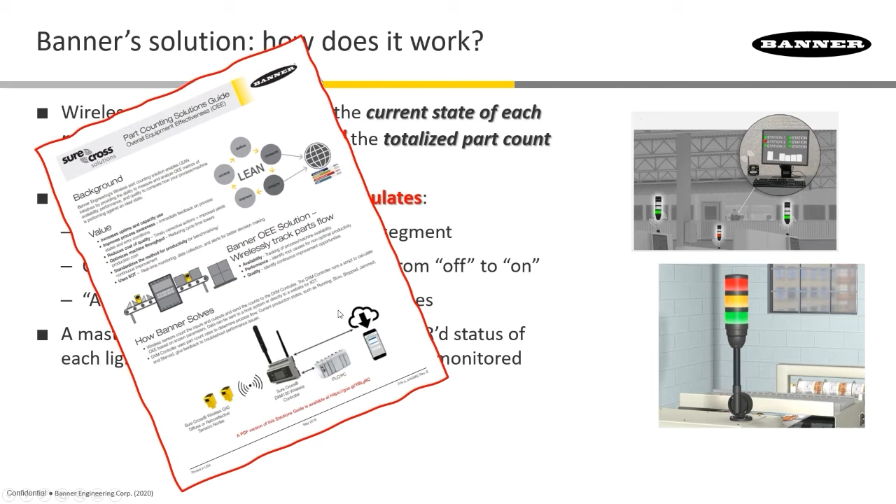So you can go ahead and utilize the different TL70s or K70 devices, our touch buttons, our lights, and incorporate them back into a DXM, and you'll get great control. That's already written up, gives you a great idea of how to do it, what we're doing inside our software, and the tools you'd need to do that. So if you have questions on that, reach out to the C&E guys and they'll help you identify the parts you need, things like that.

Chad also brought this up early on, and I just wanted to reiterate: we're going everything from the banner sensors, radios, that controller in the aggregation side, where we're taking and aggregating our data, putting it together, maybe starting to move it to the cloud with our connectivity, whether over Ethernet or cellular, and then pushing it over finally to the Banner CDS side, or maybe even directly from that controller, having it send out an email saying, hey, you have an issue, you need to take care of this. So Banner's offering these end-to-end solutions, whether for vibration monitoring, tank levels, or the effectiveness of your machines running on the plant floor.

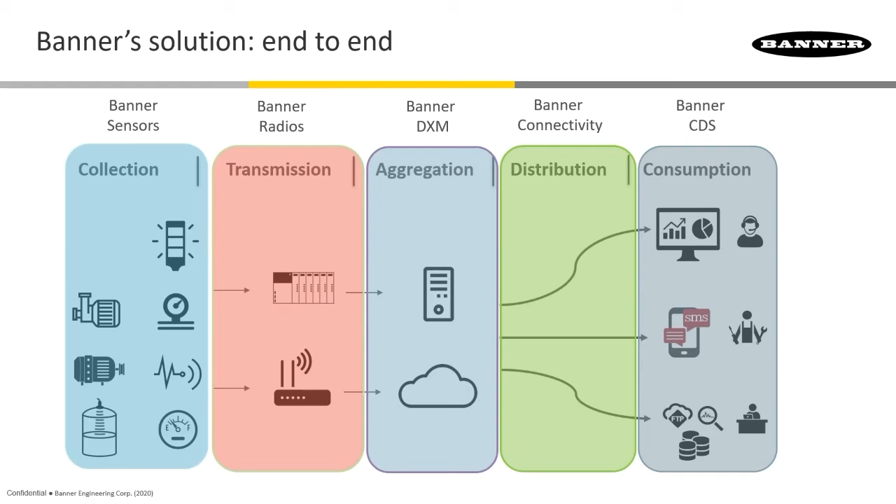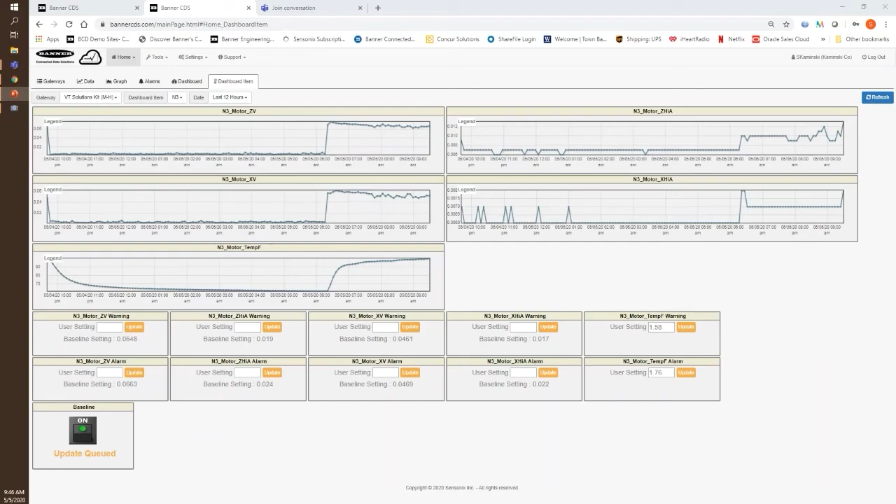So with this, let's go ahead and take a quick look. I'm going to get out of this and change back over. We are going to look at this real quick here. I'm going to get to the right spot. Sorry about the delay here, guys.

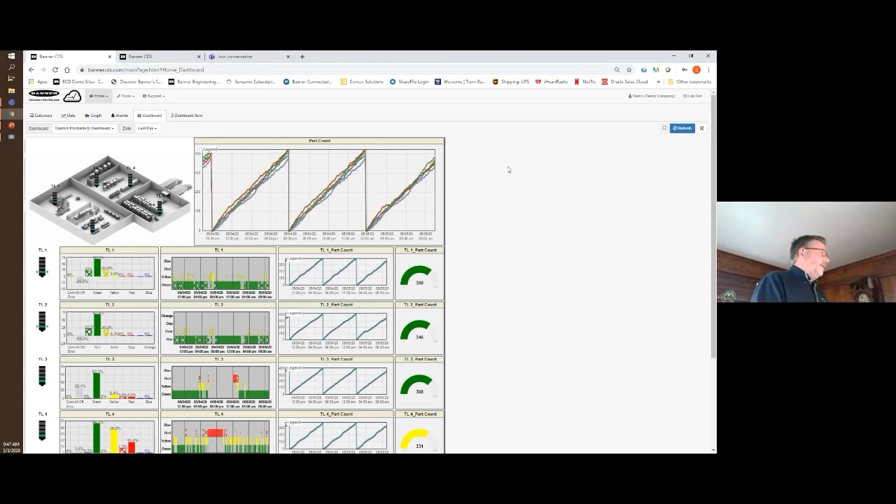Here we go. So now, once again like I did from Brad's demonstration, we're going from the kit to the virtual Banner Connected Data Solution, or Banner CDS. We went from his kit to where you saw the motor information online. This is the information from an OEE side of it. So when we go from actually looking at and pulling data on how well my machines are running on the plant floor, we're going to take that data and move it up to the Banner Connected Data site. Once again, you can see here where we're showing simple things. So if you have a layout of your plant, you want to drop in a couple icons. We're using stack lights here showing the operation of the day. These stack lights are little icons placed over an image, so I can click on any one of the icons.

I can bring up the data that's associated with it, or I can have a nice overview dashboard, like this example showing parts count. Each day they're counting up, building production on different parts, then resetting that count back to zero at night and restarting for different shifts.

You'll see different shifts changing over as they go through it, and you'll also see basic status of what's happening. We use red, yellow, green, and blue, different colors within our stack lights, and we put them up here. We allow you to name these out, so however you want to call out the status or condition represented by a yellow light, you can do that. You have the ability to edit and make alterations as needed.

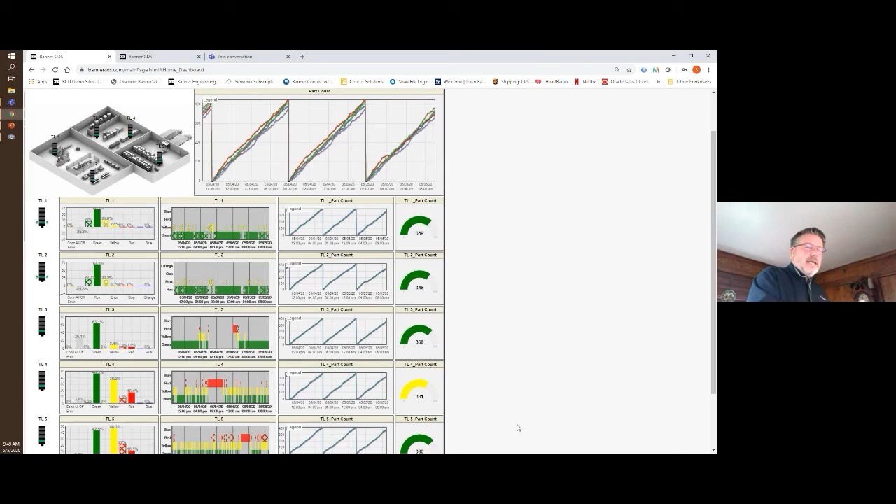Hopefully this gives you an idea of how we go from the raw sensor at Banner all the way through to connecting up to a website and sharing data. Remember, this is our website, available at bannerengineering.com and bannercds.com as well. But you can also take the data coming from these controllers and move it to a server of your choice. There's methods for doing that, and if you have questions, feel free to reach out to the folks over at C&E, and they'll be more than happy to show you how we do that.